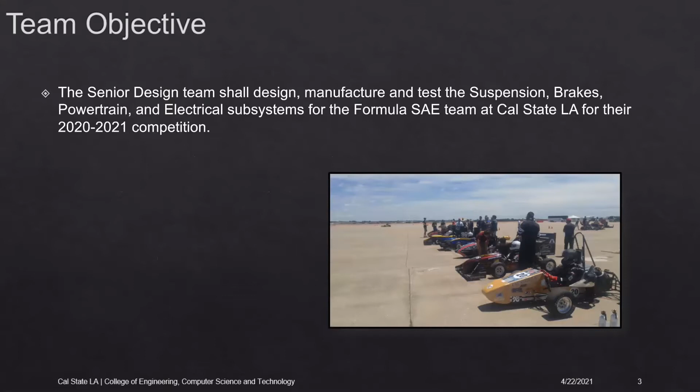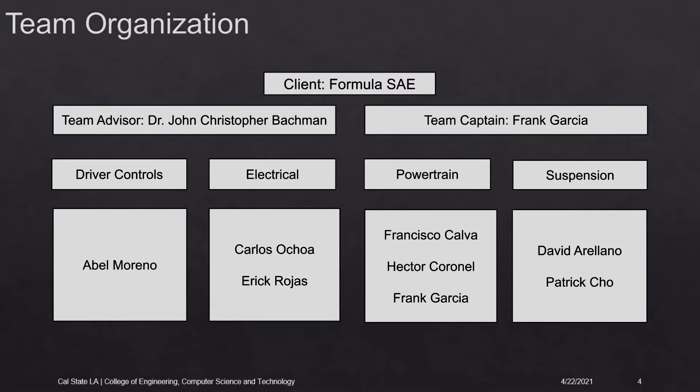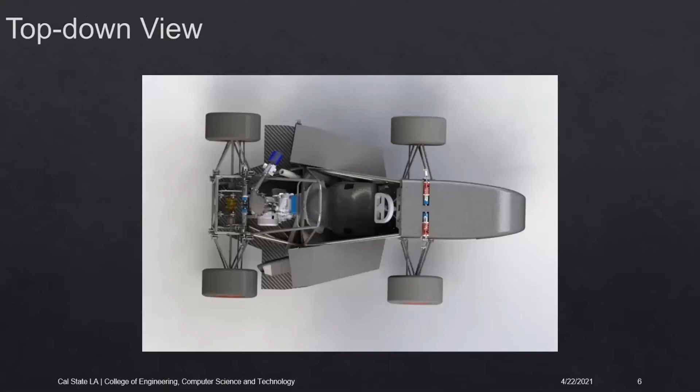So now I'll pass it on to driver controls, to Abel. Thank you, Frank. My name is Abel Moreno. I was in charge of driver controls, and right now you're seeing the pedal assembly. Everything else will be manufactured out of aluminum 6061 T6, except for the steel tabs that's going to be holding up the pedals.

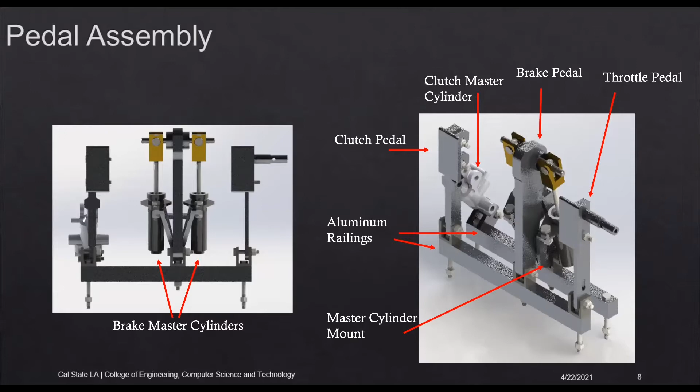The final component for my section was the shifter. We opted in for a left-hand shifter.

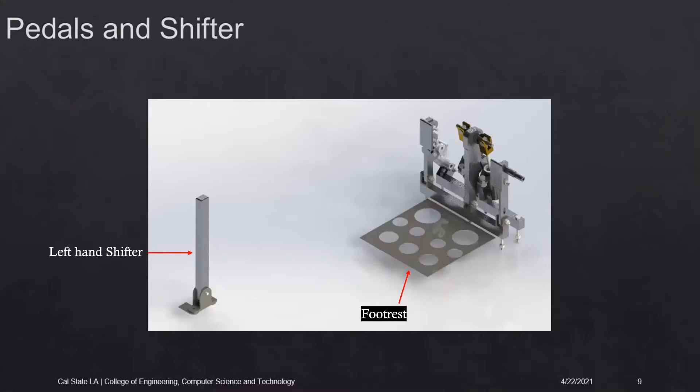Here we have our brake pedal analysis. Due to some software limitations, we had to treat the pivot point as a fixed point. Because of that, it led to a safety factor of 1.89 with an applied force of 2,000 newtons or 450 pounds, and that is set by the Formula SAE rules.

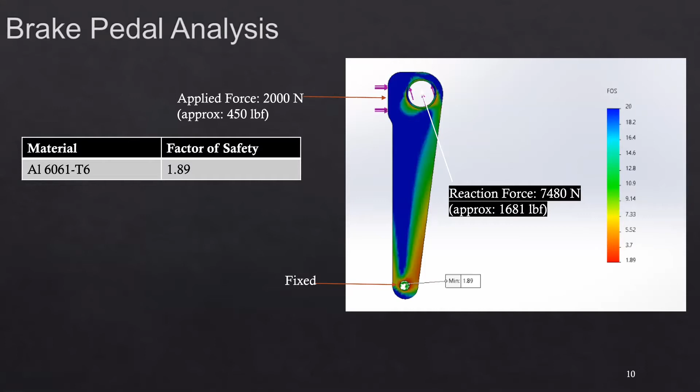Here we have the brake pedal kinematics. Gamma is the angle between the brake pedal and the base, and alpha is the angle between the master cylinder and the base. Ultimately, we calculated a value of 0.55 del C, and while the CAD simulated a compression rate of about 0.6 inches, we decided to go with our calculation, seeing how it was a bit lower, and we wanted to make sure that we didn't overestimate the value.

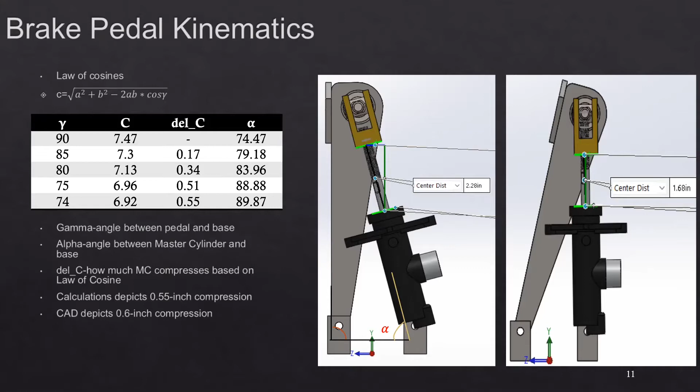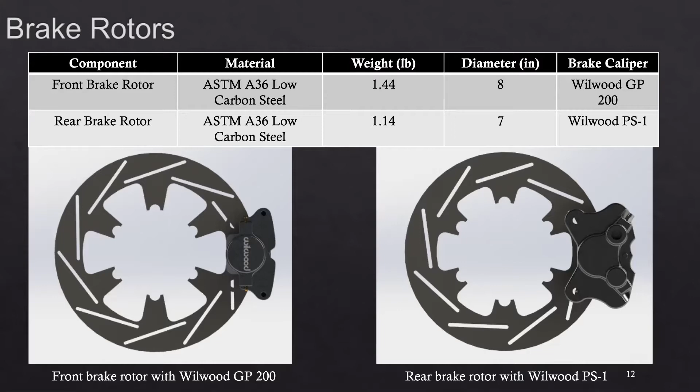For our brake rotors, we decided to go with ASTM A36 low carbon steel. The front rotor is about 8 inches in diameter, and the rear is 7 inches in diameter. This is to accommodate for the weight shift that happens while braking. It's also the reason why we chose two different calipers, the Wilwood GP200s for the front and the Wilwood PS1 for the rear, since the GP200s have a greater piston area, which allows for a greater braking force.

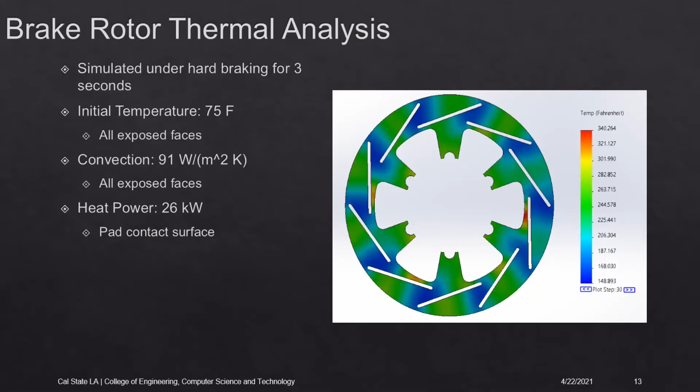Here we have a second thermal analysis of the front brake rotor. This is to be simulated for the endurance portion of the competition. This was more of an iterative process, also due to some software limitations. We set it up for 3 different laps. The first lap had an initial temperature of 75 degrees, which resulted in a max temperature of 318 degrees, which was then used as the initial temperature for lap 2, and so forth.

Ultimately, after lap 3, there was no dramatic change in the peak temperature range, since lap 2 resulted in 328 degrees Fahrenheit, and lap 3 resulted in a 329 degree peak temperature Fahrenheit. But it was still in our desired range of 250 to 350 degrees Fahrenheit, which would allow our brake pads to reach a friction coefficient of 0.4 to 0.45.

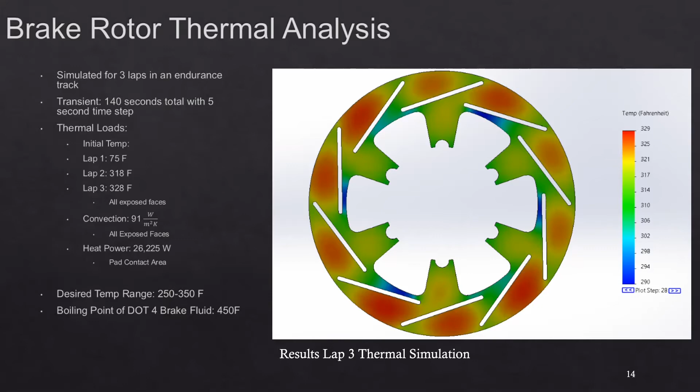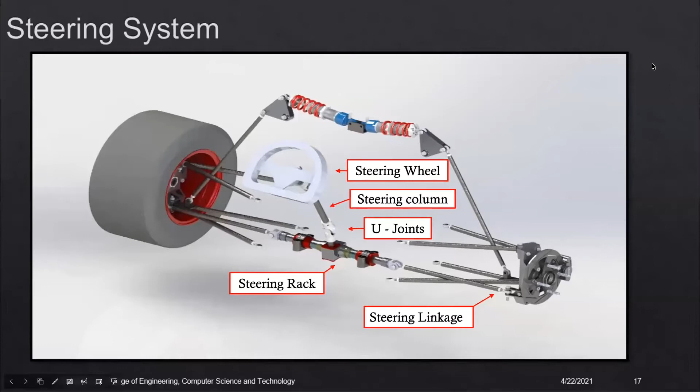I will now pass it over to David and Patrick to talk about suspension. Thanks, Abel. Hi, my name is David Arellano. I designed the front suspension, and Patrick Cho designed the rear suspension. This is the steering system that consists of the steering wheel, steering column, U-joint, steering rack, and steering linkages. All of this is designed to maximize friction, roll, and stability with the ground.

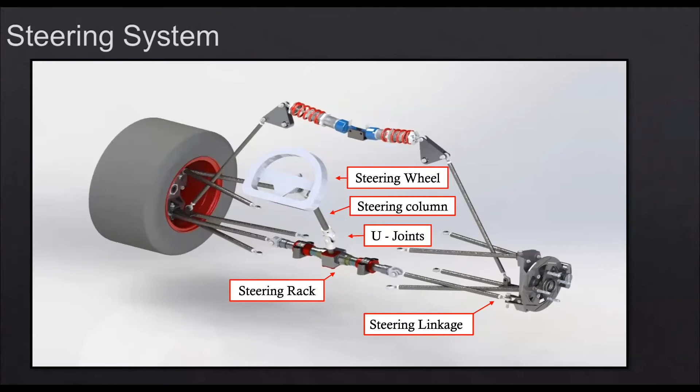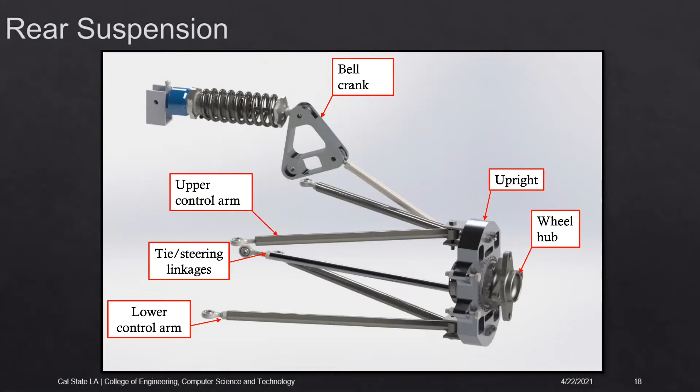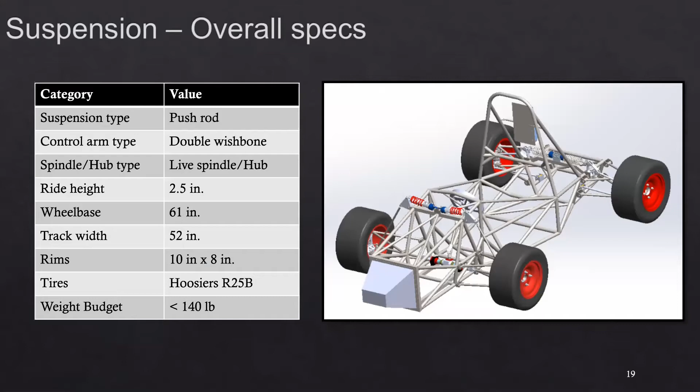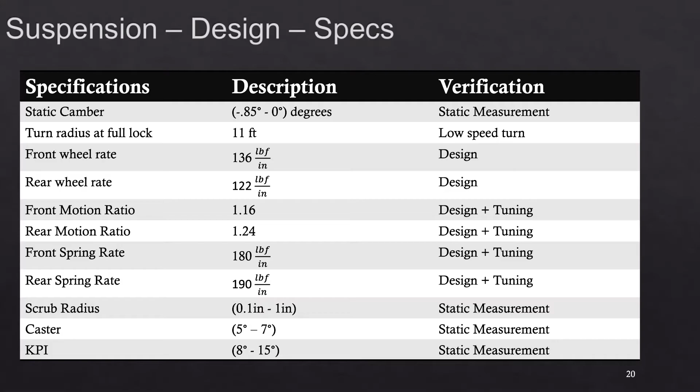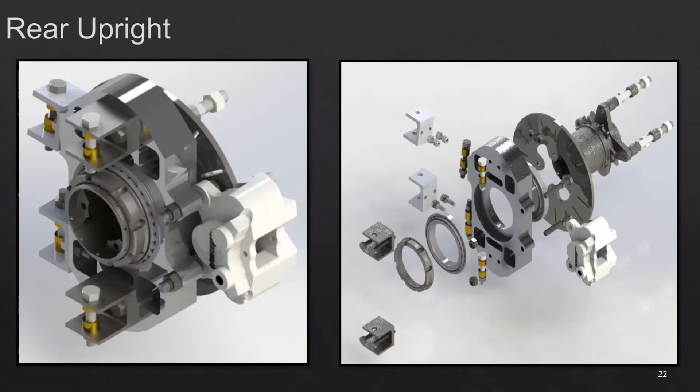Next slide. Now I'll pass it over to Patrick to talk about the FEA analysis.

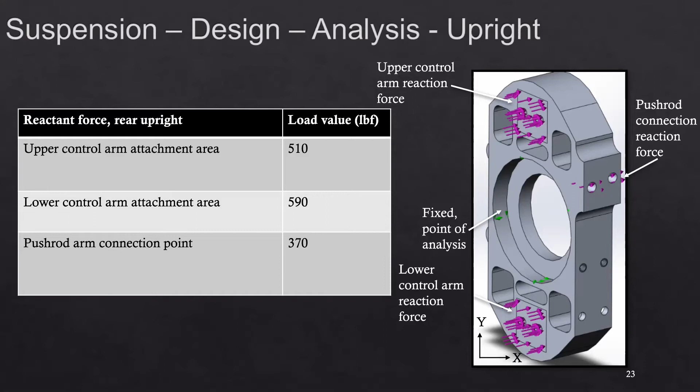The FEA analysis for the uprights included using free body diagram analysis to determine the reaction forces at various points on the upright. The reaction points we analyzed were the upper control arm mounting point, the lower control arm mounting point, as well as the pushrod mounting point.

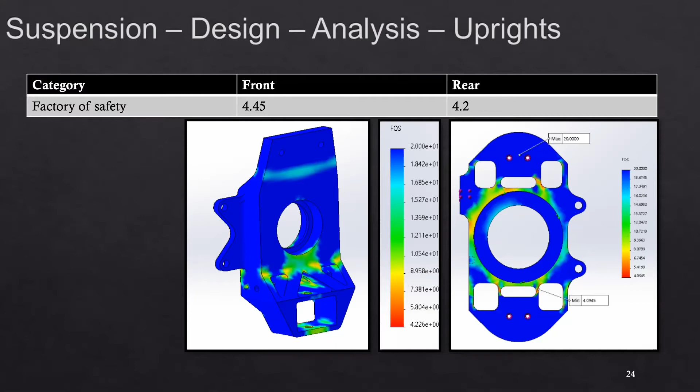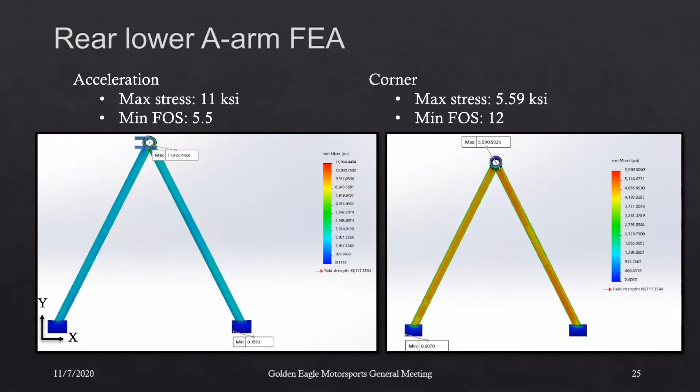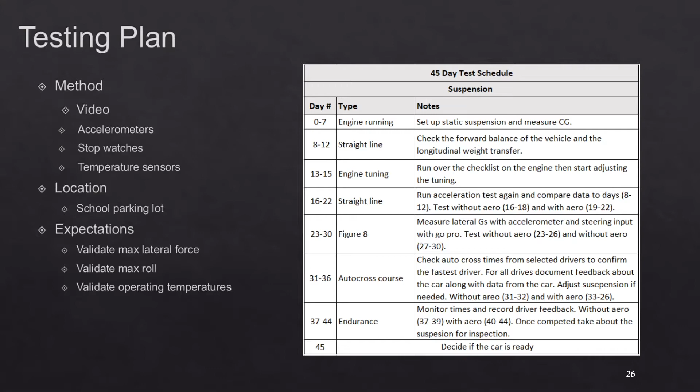Now I'll pass it over to powertrain, covered by Francisco, Hector, and Frank.

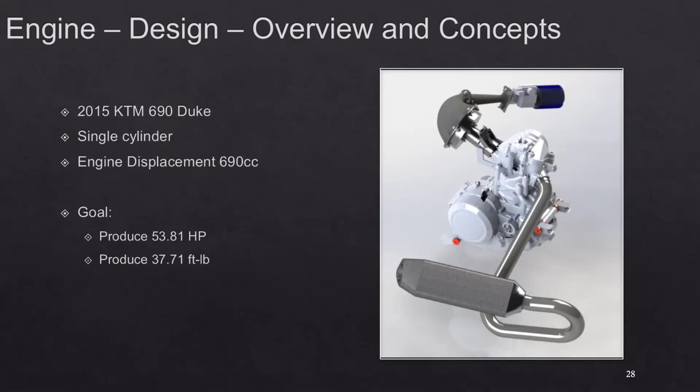The goal for the engine was to produce 53.81 horsepower and 37.71 foot-pounds of torque. We hope to achieve our goals by optimizing our designs at 6,000 RPMs.

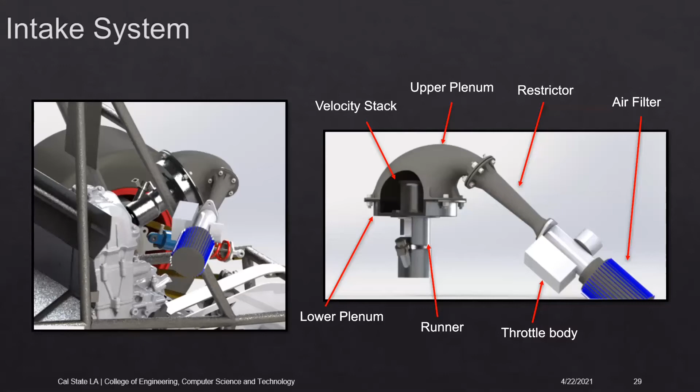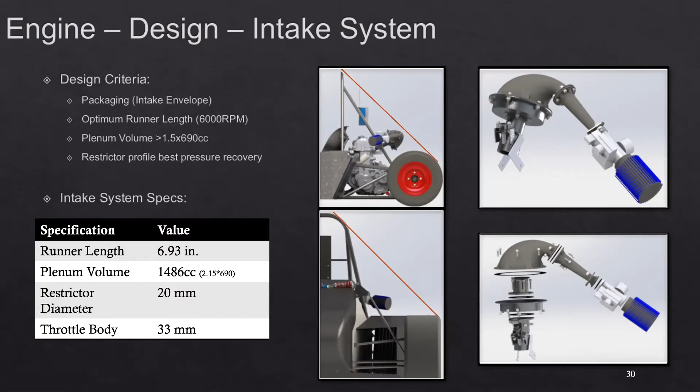The specifications for the intake system are shown in the table. On the right, it is shown how we packaged our intake system, where the red lines represent the boundary of the specified intake envelope. Next slide.

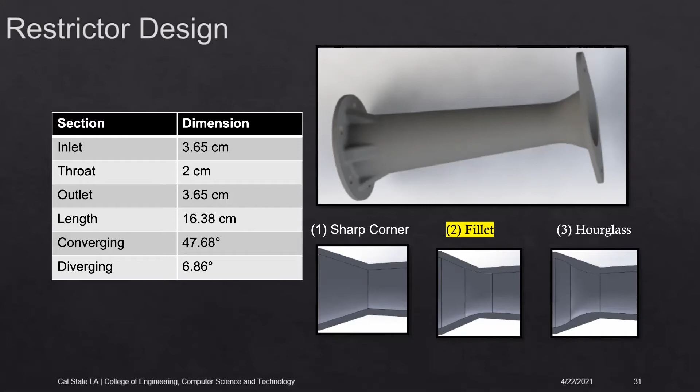The restrictor was chosen based on which one had the best pressure recovery using CFD analysis.

The assumptions made for our simulation were that our system is working with 100% volumetric efficiency, meaning it provides 690 cubic centimeters of air into the engine, and that our engine is running at 6,000 RPMs.

The boundary condition for the inlet was atmospheric pressure, and for the outlet, it was a calculated mass flow rate of 0.0423 kilograms per second.

As previously stated, the design with the fillet was shown to have the best results. Now I'll pass it on to Hector to cover the intake runner. Next slide.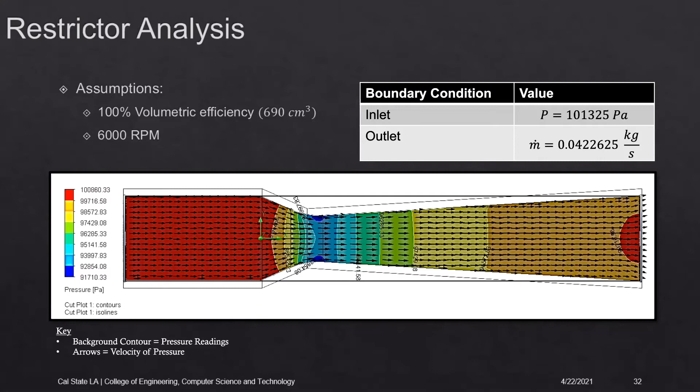Good afternoon, my name is Hector Coronel. I'll be discussing the runner length design, some of the components, some analysis and results that we obtained, and finally pictures of what we've been able to manufacture thus far.

The runner length design is comprised of 2 components, the velocity stack and the runner. The main objective of the velocity stack is to smoothly guide airflow as it's traveling down the intake system. Similarly, the main objective of the runner is to also guide airflow while also being responsible for having the fuel enter into the engine.

Some of the measurements that we considered are the inner diameter, which was 1.86 for both components, and the material we selected was aluminum 6061 T6. We chose this material because it's cheap, it's durable, it doesn't weigh much, and it's easy to machine. As for the length, we got 2.3 for the velocity stack and 4.5 for the runner.

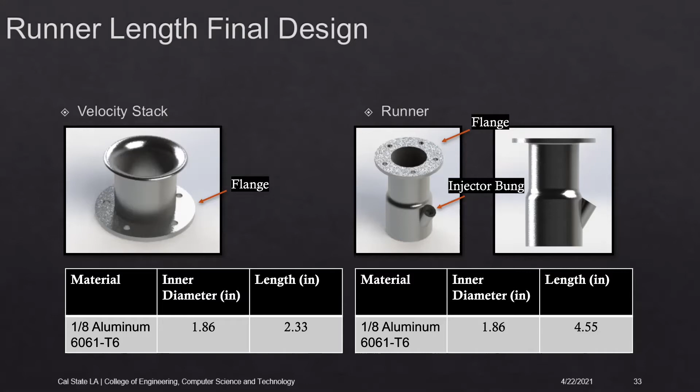In order to determine the ideal runner length, we needed to analyze and research a 4-stroke engine. There are 4 main parts of a 4-stroke engine: the intake stroke, the compression stroke, combustion (also known as power), and then the exhaust stroke.

We needed to analyze the camshaft duration and how long the valves will be open and closed. We can also note that during the 4-stroke engine, there will be 2 full revolutions, and there will be pressure waves traveling at the speed of sound, which is 343 meters per second.

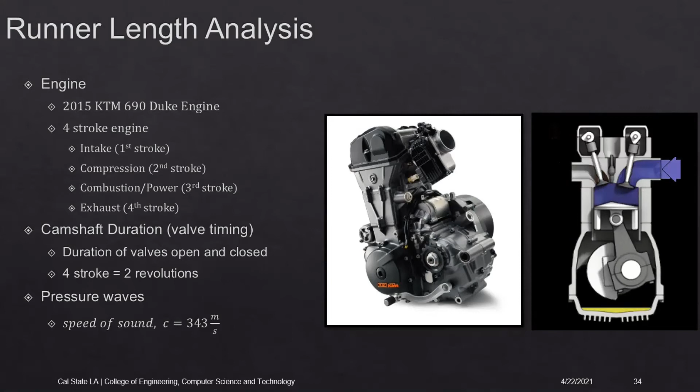After doing some testing and calculations, we were able to obtain results for intake and exhaust valves. For the intake valve, we concluded that during 2 revolutions, it will be open 228 degrees and closed for 492 degrees, and that the valve lift will be 0.420 inches.

We were also able to obtain the location of the RPM of peak power using a power band that we got from the manufacturer. We obtained that the peak engine power will be at 6,000 RPM.

As for the runner length, we were able to obtain runner lengths at different RPMs and different pulses. We concluded that the pressure wave at the 5th pulse would be more ideal, and that it would need to be at least 6.84 inches. Our final runner length was 6.93 inches, so it satisfies it.

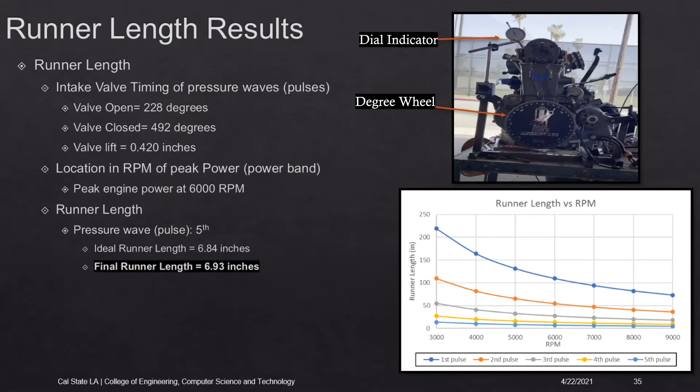The following is what we've been able to manufacture thus far. For the velocity stack and the runner, we decided to make a prototype of how the component would look once manufactured. We did this by 3D printing the component using PLA.

For the runner, we already have it mostly manufactured using aluminum 6061 T6. We did this using the lathe machine. However, we still need to manufacture the flange and then weld it to the runner.

As for the velocity stack, we have yet to manufacture it, but we are planning to use a CNC machine to manufacture the final component. Now I'll pass it back to Francisco. We'll talk about the exhaust.

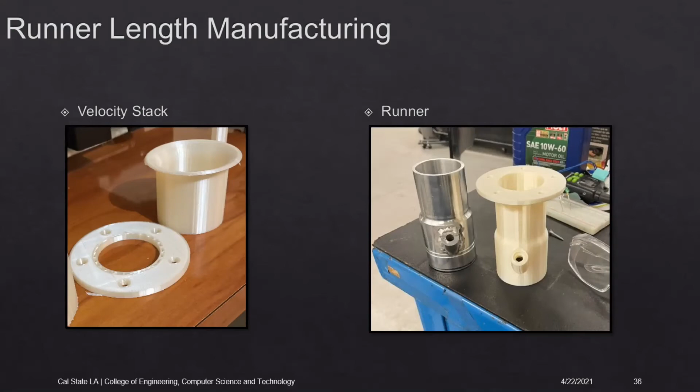Moving on to the exhaust system. The main criteria was to incorporate the exhaust system into the side pods while optimizing the header length for 6,000 RPMs. We also wanted to choose a muffler that will reduce the amount of noise coming from the engine. The dimensions for the exhaust are shown on the table. The material used for the header was chosen to be stainless steel 304.

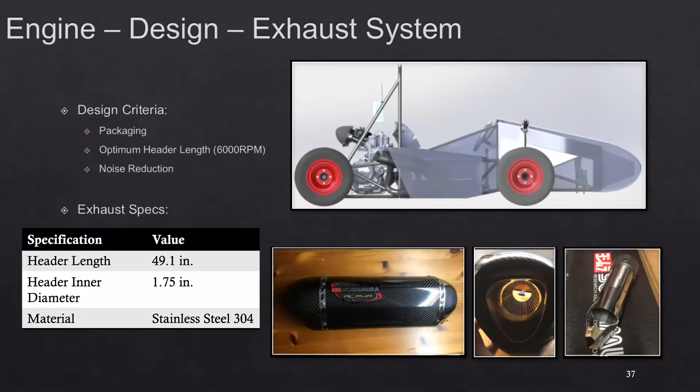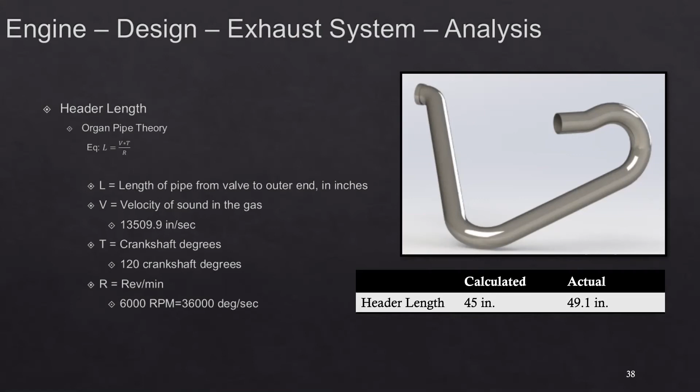The length of the exhaust header was determined using the organ pipe theory, which has been shown to yield good results for a single cylinder engine. The equation calculated the length using the velocity of sound in gas, the crankshaft degrees, and the RPM. The table shows the calculated length to be 45 inches, but the actual length due to packaging was 49.1 inches. Now Frank will talk about the cooling and fuel system.

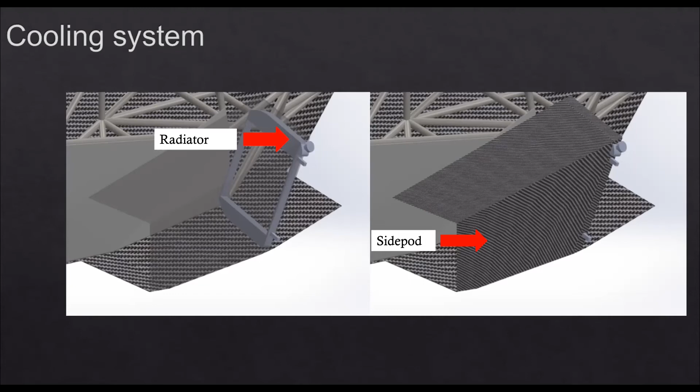For the design of the cooling system, the criteria, as mentioned before, was integration with the side pod design, allowing it to be packaged to be used for prolonged use in static and dynamic events, and to keep the temperature of the engine below 257 degrees Fahrenheit.

The specs for the cooling system is a 10-inch diameter fan attached to the back of the radiator, and the radiator itself is an Austin Mini Cooper radiator with the specifications in the table below.

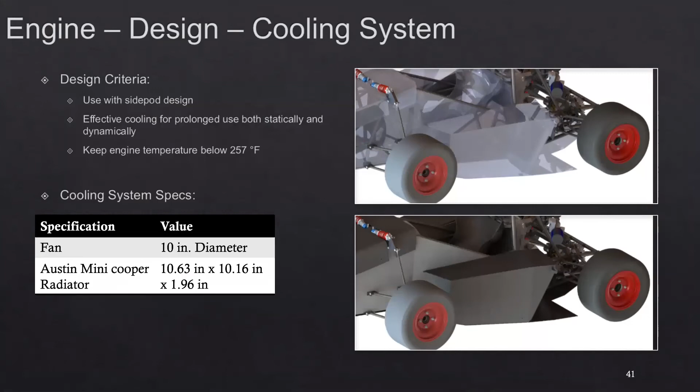As mentioned, the radiator is an Austin Rover Mini Cooper radiator, so it's a car radiator, made of aluminum. The radiator internally has 2 rows, which allows for a larger area of cooling, meaning the water has more surface area to hit, propagating cooling at a higher rate and allowing colder water to enter the engine. The radiator can support the 10-inch diameter fan, which activates at a certain temperature to allow for even more cooling as it pulls air through the radiator.

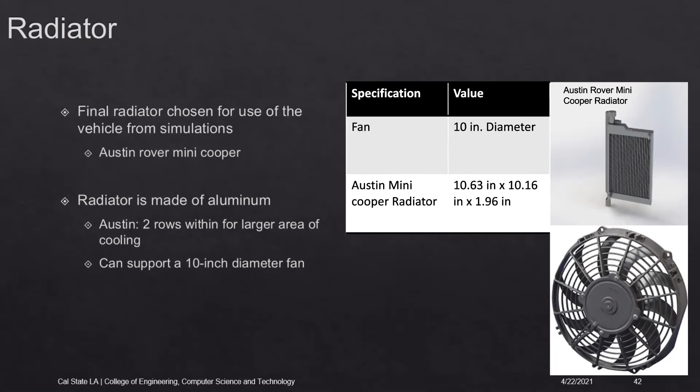For some of the analysis done on the radiator, radiator 1 is the Austin Rover radiator, which was compared against the power curve of the engine. As you see on the right, the two graphs show the power curve of the engine on an RPM curve, plotted against the radiator being used along with the engine. The graph at the bottom is the temperature of the engine, showing how much temperature the engine will be producing relative to the amount the radiator will be subtracting from that engine.

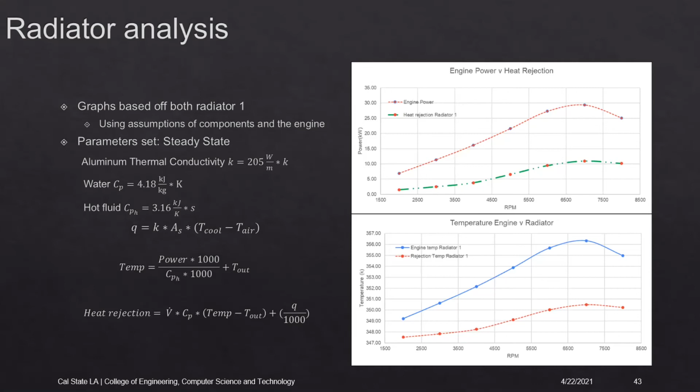Now for the fuel design. For the fuel system, the design criteria was just packaging and being able to last the full endurance track. As you can see on our table on the left, we have specifications for the fuel tank. The fuel tank will hold 91 octane fuel, which is standard for the engine. The volume of the gas tank is 2 gallons, and the overall weight of the fuel system is 4.3 pounds.

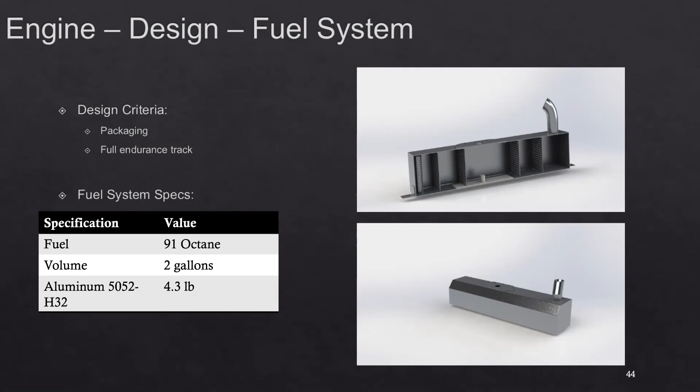The fuel tank is made of aluminum 5052, H32. The tank volume is 2 gallons, based on the RPM given through simulations run on Excel. The internal components of the tank include 4 baffles to minimize sloshing, helping the Holley mat, which is an internal fuel filter, absorb the fuel at a much steadier rate.

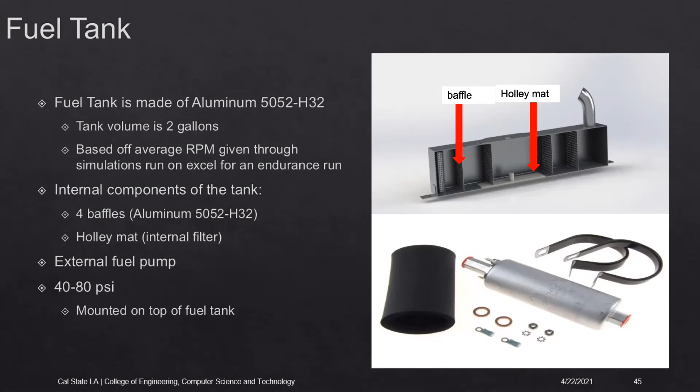An external fuel pump will be used, rated for 40 to 80 psi, mounted on top of the tank to allow ease of use and to be swapped out in case of any malfunctions.

For engine testing overall, some of the methods we'll be using include a flow bench to test the restrictor and the intake system, an engine or chassis dyno to mount the engine and get an overall power curve and see whether the restrictor is performing as intended, temperature sensors for the radiator to allow inlet and outlet temperature readings, a decibel meter to be used on the exhaust to verify we're under the noise restriction, and a practice course.

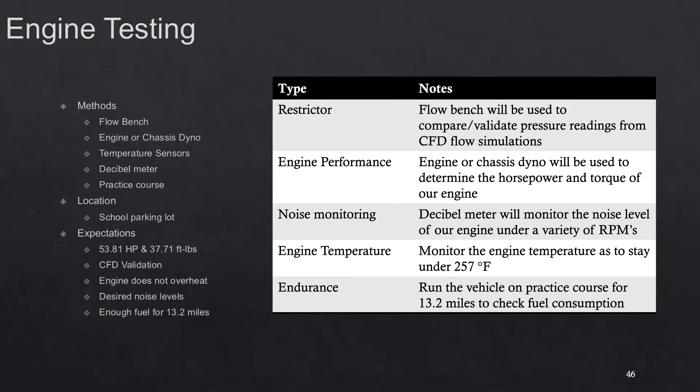As mentioned before by suspension, testing will be done at school. Our expectation is that this engine and the newly mentioned parts will allow the engine to reach 53.8 horsepower and a torque of 37.71 foot-pounds. This will validate CFD. The engine will not overheat, we will have the desired noise level, and we will have enough fuel to run for 13.2 miles, the length of endurance. Now I'll pass it on to electrical, which is both Carlos and Erick.